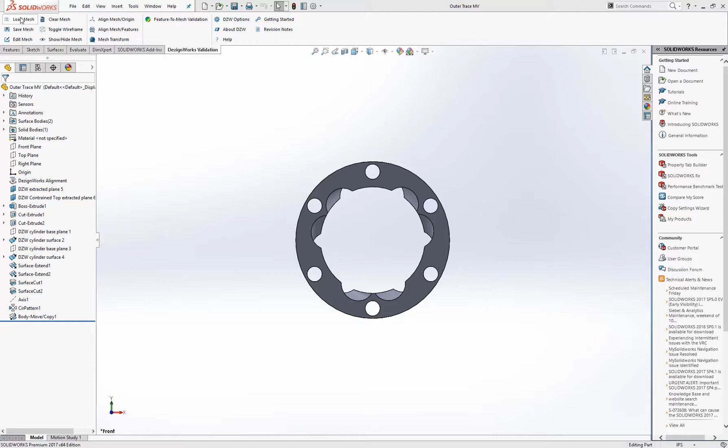So let's get started. We're going to load a mesh. It can be any STL or OBJ. Normally these formats can be very large, so DesignWorks can handle large formats of STL and OBJ files.

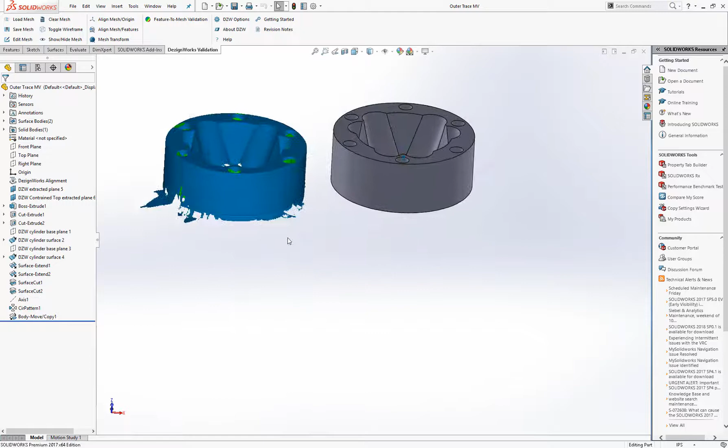This part here we're going to bring in would be a real problem to align, so we're first going to use the best fit method. As you can see, the part does not have to be scanned perfectly. You can see here there are outliers and other stuff on it.

Again, this is our native model over here. Everything's in the tree. This is the imported STL, or it could be an OBJ. We'll go ahead and go normal to the front.

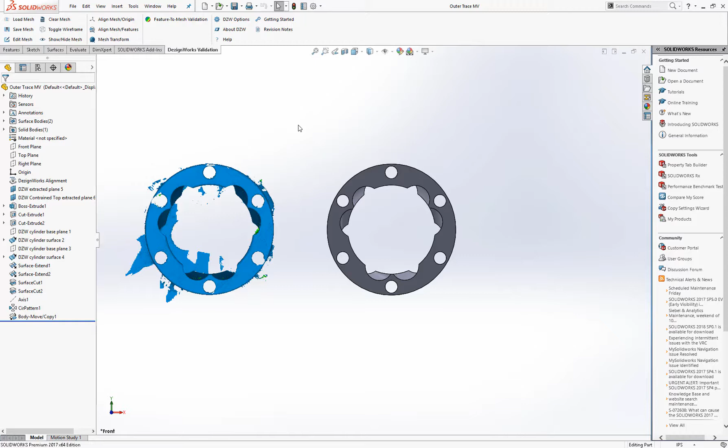The next step is we need to align the two to validate how close the scan file is to the native model. We're going to say align mesh features. There are three different types: we can do an origin alignment, align mesh features, which in this case we're going to do, and best fit. There's also a datum alignment we'll talk about in another video.

So let's do a Control A to select everything, and we're going to say best fit.

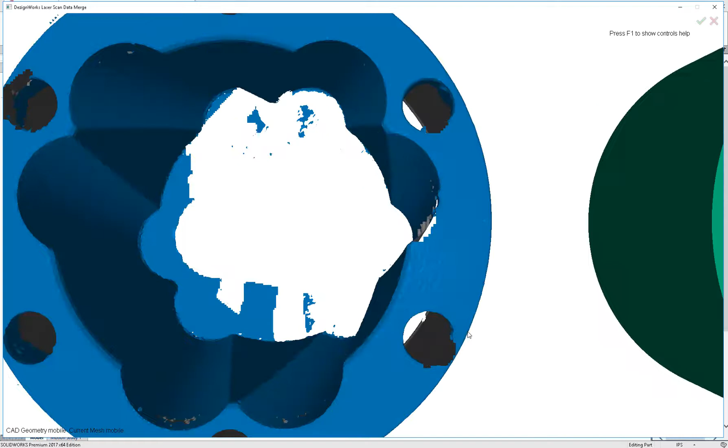A new screen appears. This lets you interactively move these models. So if one of these was a little crooked, or in this case, when you scan on the shop floor, this part could be out here crooked like this. So when you bring these in, you can move this around independently.

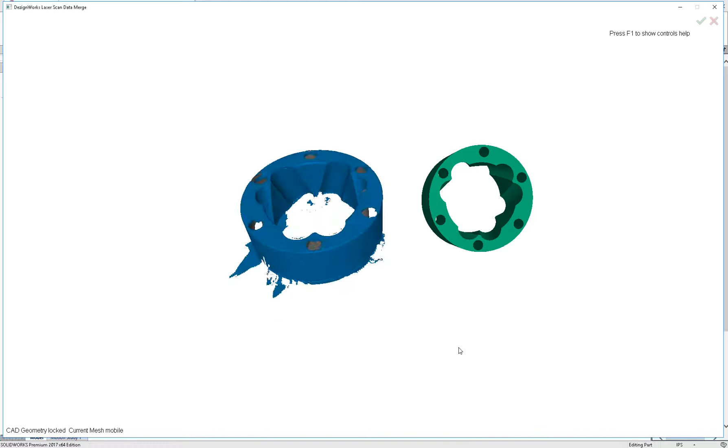And you can line these up. You can move either the one on the left or the right. This happens to be the scan file. If you want to move the other one, you can move this one. It really doesn't matter, it lets you move them so you can view them, because how the person scans on the shop floor could be a totally different orientation than how you designed it.

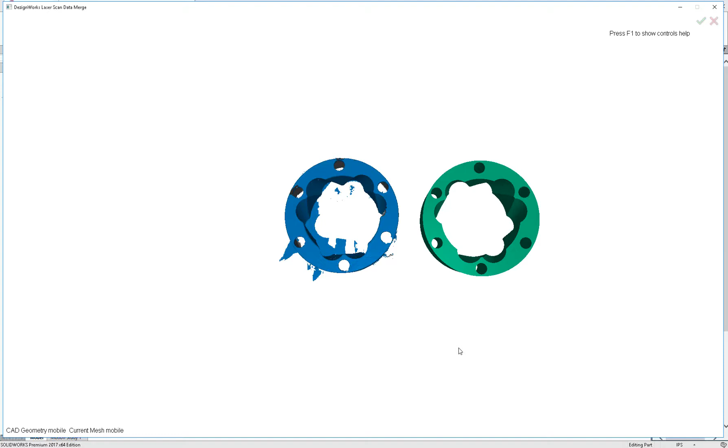In SolidWorks, we're going to take the mouse and click on the part, clicking in similar locations. What this does is assist the best fit fitting. So we're going to rotate it around and pick somewhat similar places to get this started.

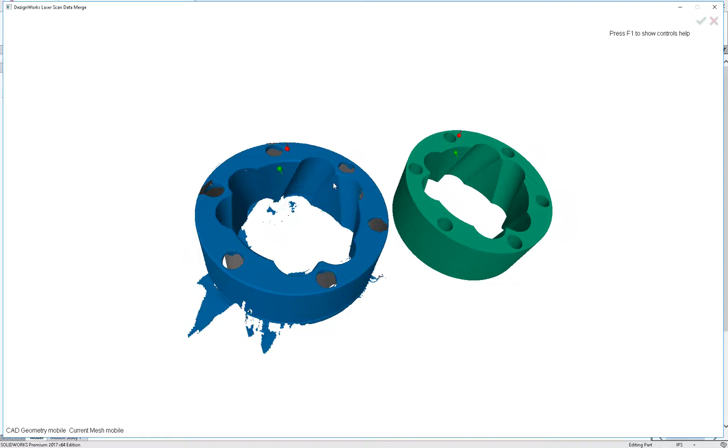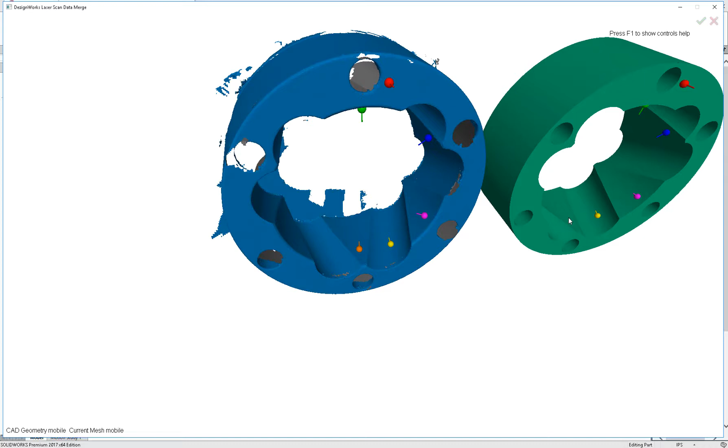You need 6, 8, 10 selections to help get it started. Again, we're picking in like areas. Very simple, you're just taking the left mouse and picking some areas. It doesn't matter if you pick the one on the left first or the right first, as long as you're picking in somewhat similar areas. Again, this just assists the fitting for the mathematics.

So we'll pick on here a few places to help assist it, and then it'll automatically put it together. Very, very simple to use.

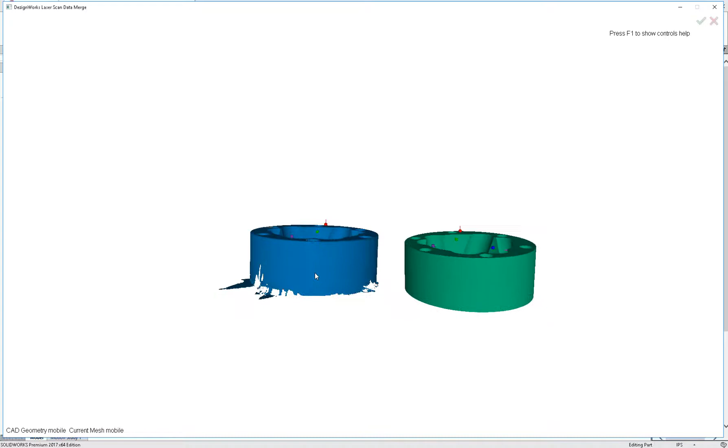We'll go over here and pick on this face once to help line it up. The more you can assist it to help get it started, the faster the processing. You may look at it and think, maybe I want one more pick over here or something.

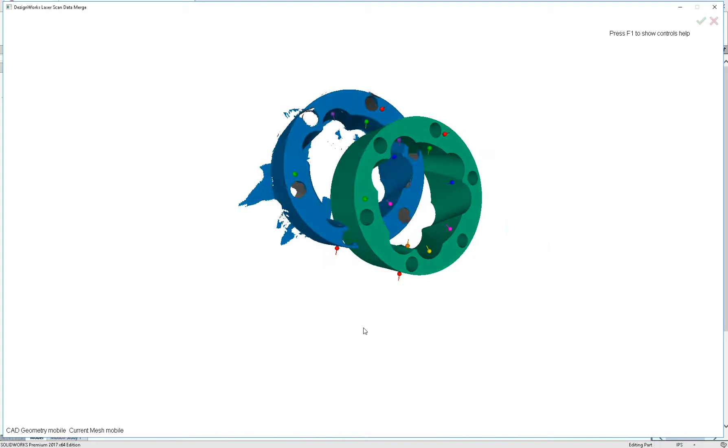At that point, you press the S key to snap the two together, then hit A for auto fit. The auto fit will compress the data and you'll see the process on the screen, best fitting it back and forth through all the different triangles.

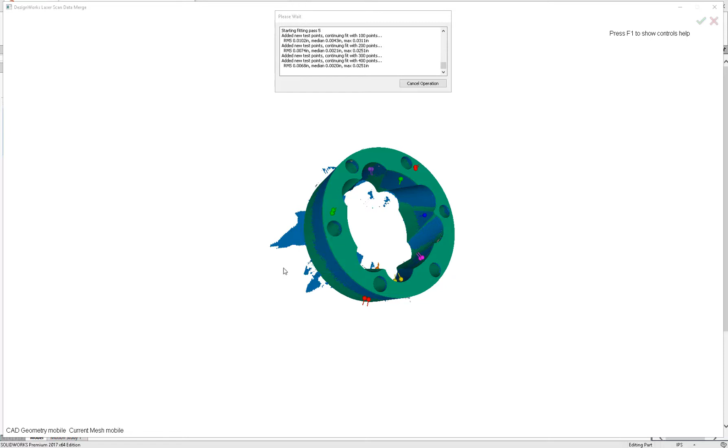Actually, it's pretty good. If you wanted to see if you could get any better, you can hit the A key again and rerun it.

It's very fast and efficient. In just a few quick steps, you can align your STL or OBJ to your part.

Now the two parts are together. We're going to use the Dezignworks feature to mesh inspection. So we're going to go over here and say feature to mesh, and we'll select everything.

You can select one at a time with the mouse. So if you didn't want to check everything on here, say it was a casting, you don't want to check a few machine surfaces, you could. This whole part was machined.

We're going to do a Control A, and you can tell it to ignore outliers, user-defined parts, and then we're going to generate a full report. So first we'll say visualize the errors.

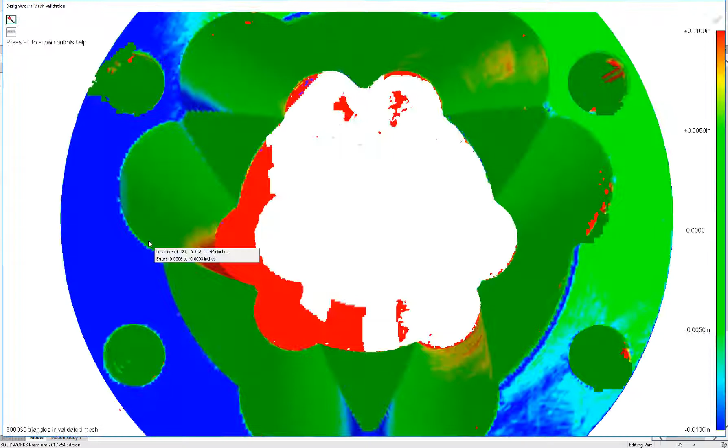It's going to show a heat map to see how everything lines up. Over here you can actually adjust your heat map to the tolerances, so we can adjust that to make it go up and down.

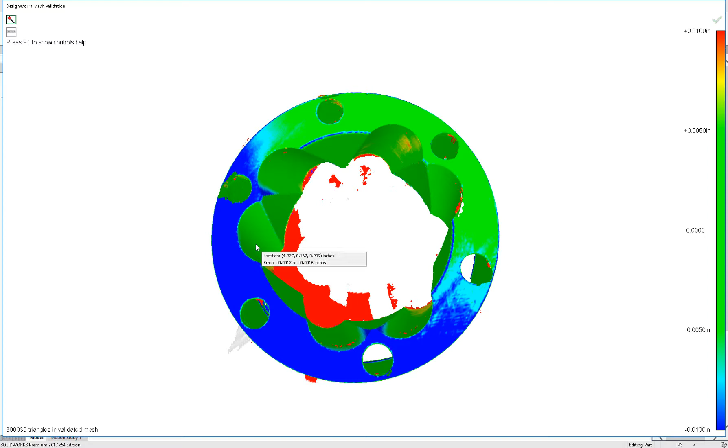Then we can also come in and do a mouse over. With the mouse over, it's going to tell you the deviation between the native Solidworks part and the mesh that was aligned. So you can see over here, it's a little out of square. This will help you see, hey, are these incoming parts actually good?

You can see in this case, the center of this lines up really good. The top part was either machined out of square or that's the issue. So not only can we do a heat map and check it, we can actually put balloons on this.

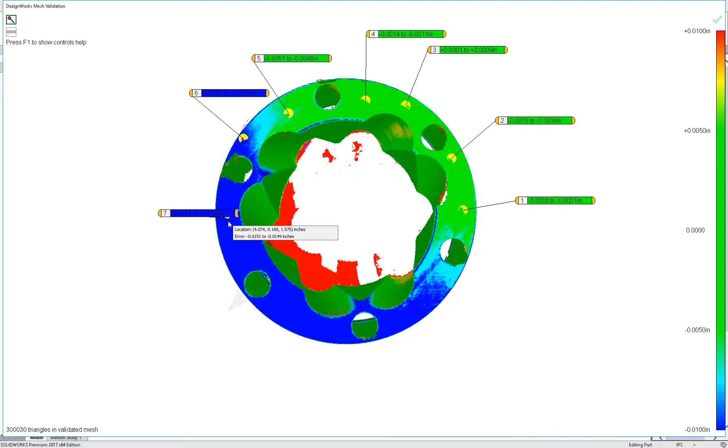So all these balloons are color coded for the deviation. It tells you based on your factor, a plus or minus, and it numbers these. And if they are a little bit out of tolerance like this, all these are colored.

You can rotate to any position you want. It's very fast and simple to use. You can see this outside diameter and ID all seem really good, so somewhere in the process, this was probably machined non-square.

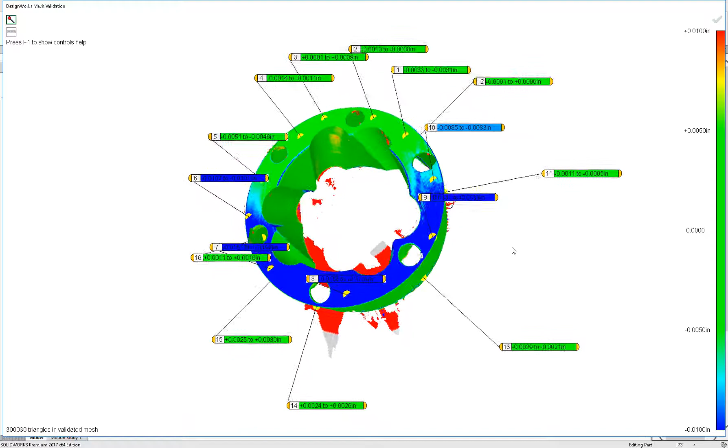So now we want to go ahead and write a report. We're going to hit the S key. You can save out any snapshot - you're not limited like a lot of products to top, front, or right. You simply rotate the part and take a snapshot.

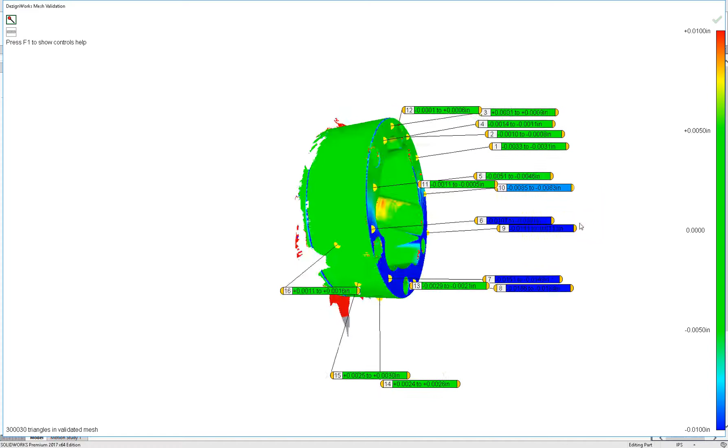All the balloons dynamically adjust. So once you have enough data there that you think will be sufficient for your report, hit the green checkbox. Now we're going to say let's create a report.

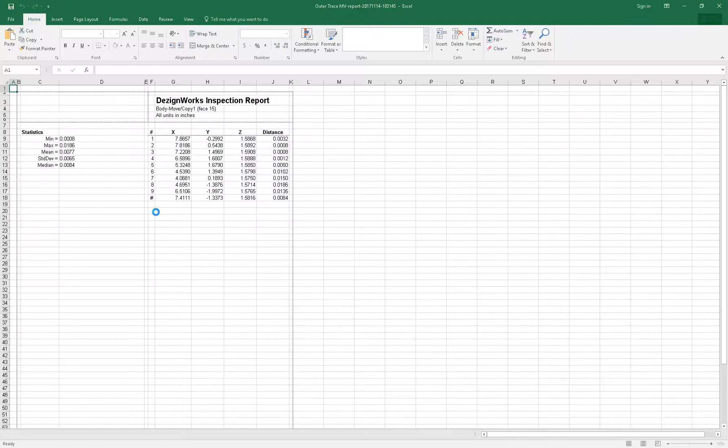This dumps us out to Excel, and you have a full report. This can all be modified and changed. At the top, it's telling you the statistics for each module.

So each face we picked will give us a report. Down here, this is data sheet 1. You can put in your organization, your company, the part number, anything you want to do.

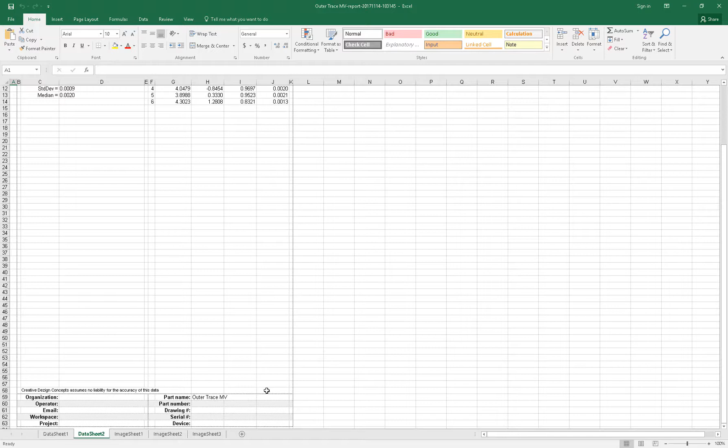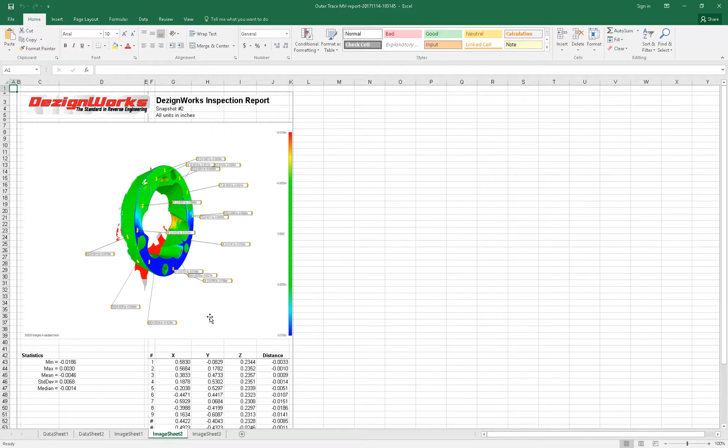Here's data sheet 2. For every face, you have the option to output it as a single sheet or combine it. Then you can go to the image sheets, which show you everything you were doing with your balloons, all color coded. There's image sheet 2, image sheet 3, and this is fully customizable.

Simple Excel. So you can see in just a few minutes we opened our Solidworks model, aligned the mesh, validated it with a heat map and a mouse over to the real features, created our balloon callouts, and generated a report. It's fast and efficient.